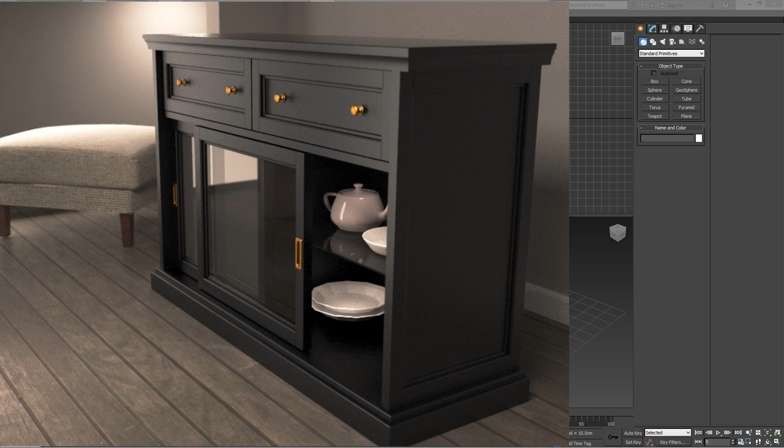Hello, in this tutorial we will be doing the Ikea sideboard. It's a nice piece of furniture. You can find it on Ikea's website, called Malsjo under sideboards and buffets.

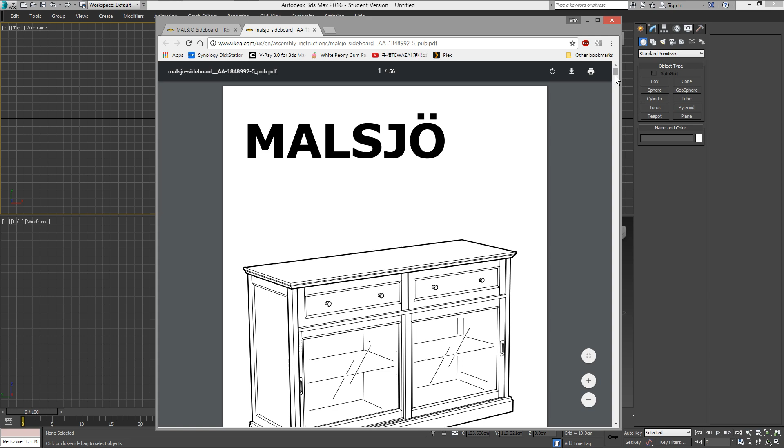If you go to product information, you can find the dimensions in inches and centimeters. Down here you'll find a PDF file with the proportions of the furniture and all the construction details. This is very useful because you don't have this information on the photographs.

So let me set up the page. Under Customize, change the unit setup to centimeters. Download the graphic with the dimensions so you can use it later.

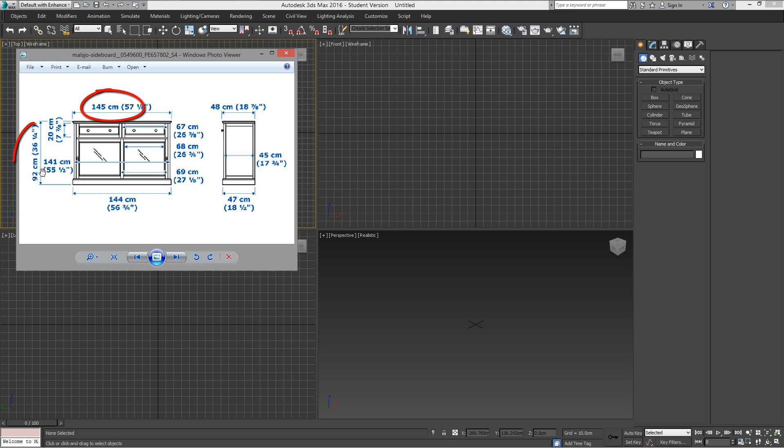We're going to start trying to get the overall dimensions of this furniture: 145 centimeters wide by 92 high and 47 or 48 deep. Right now let's just draw a box to get the height at 92 centimeters. The other dimensions are not important, only the height is useful for now.

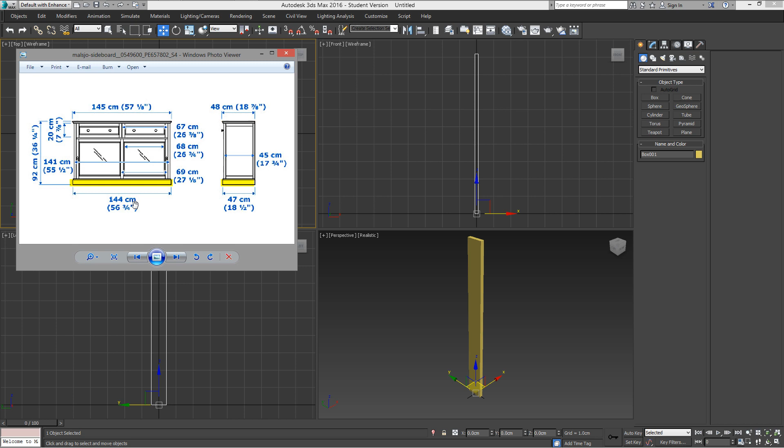Now let's start with the base. It measures 47 deep by 144 wide. The height I am going to estimate at 8.5 centimeters. So let's just draw a box, this is just a reference box. Right click here and here to center the box.

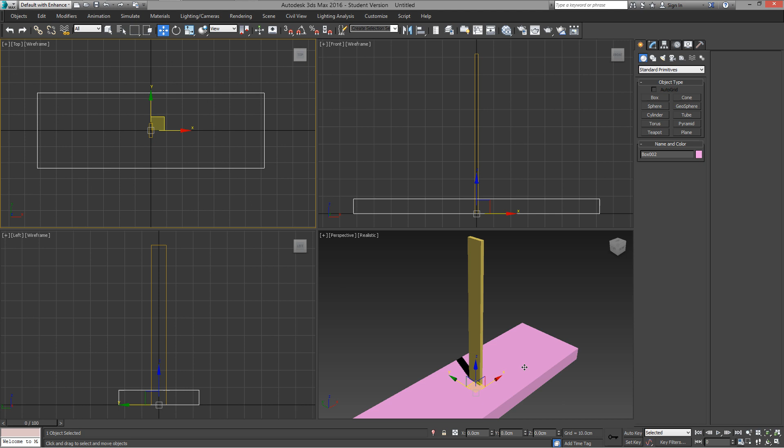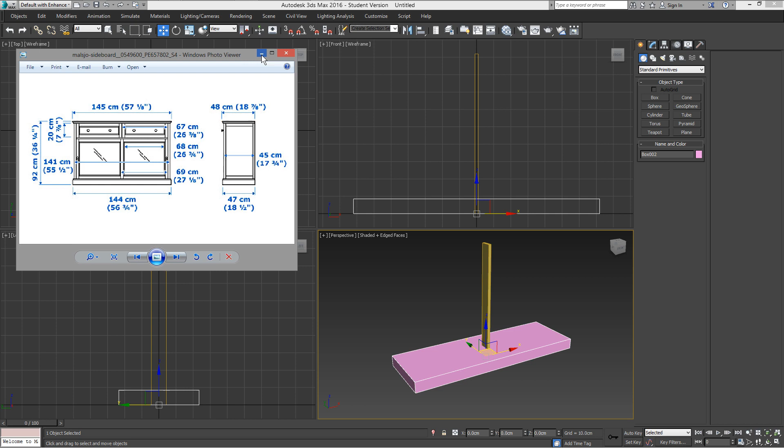Next, we need a reference box for the top, 145 by 48. I will use a slightly different size, just to make it better. I'll explain that later.

If you use 47.52 centimeters for the depth, you can leave the width at 145. The height will be 3 centimeters. Center it again and move it to the top.

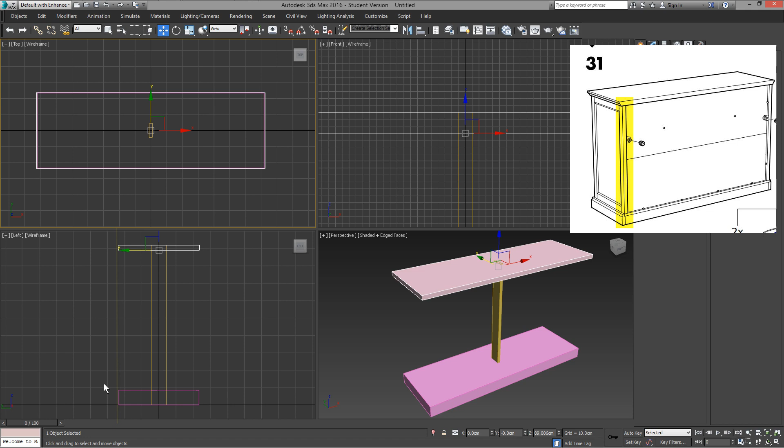We're just trying to get an idea of the overall size of the furniture. Notice the back pieces all align towards the back of the furniture, so I'm going to move the top to align with the base. This way it's centered much better, as you can see on this little square here.

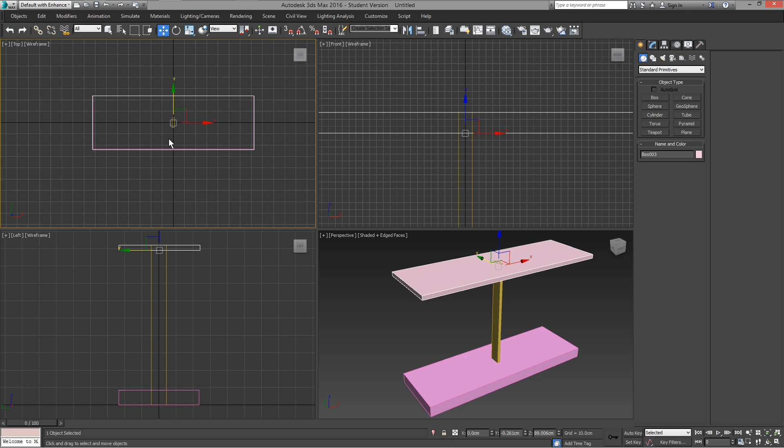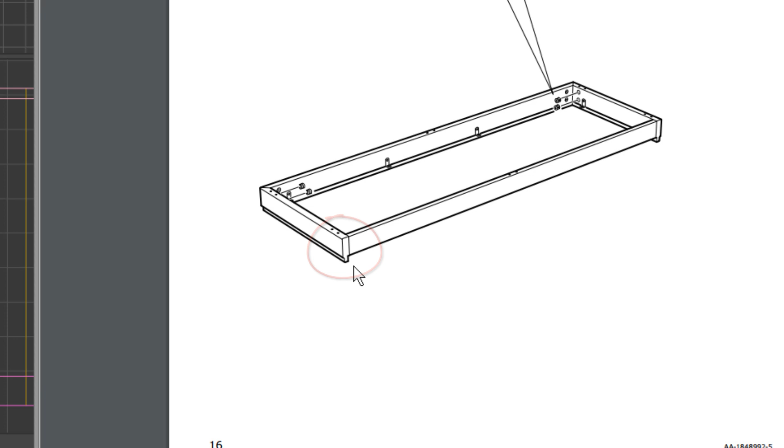Next, we need to know where to place the side frames. By looking at the photograph, I will estimate the distance from the edge. If we look at the PDF file, you can get an idea of the shape of the profile. We'll do this later, but this is just a reference to see about where the leg is going to be.

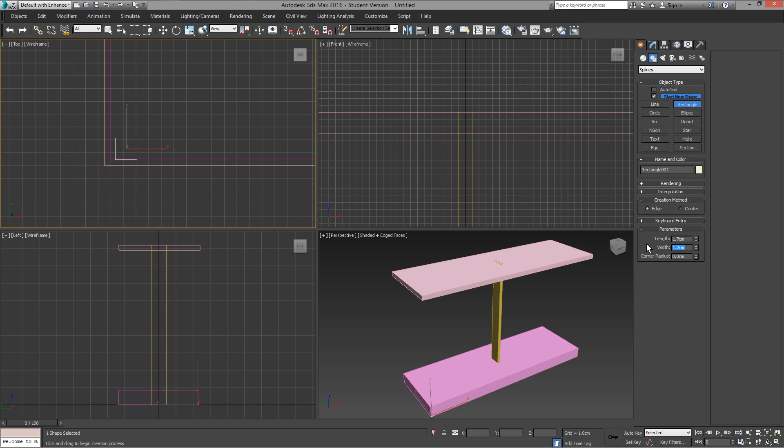On the top view, I guess the distance to the side frame is about 1.7 centimeters. So make a rectangle 1.7 by 1.7 centimeters, and then let's move this to the top of the base so we can see it.

Place it on the corner first, and then move it to the top, just a little bit above the surface. This is our reference distance.

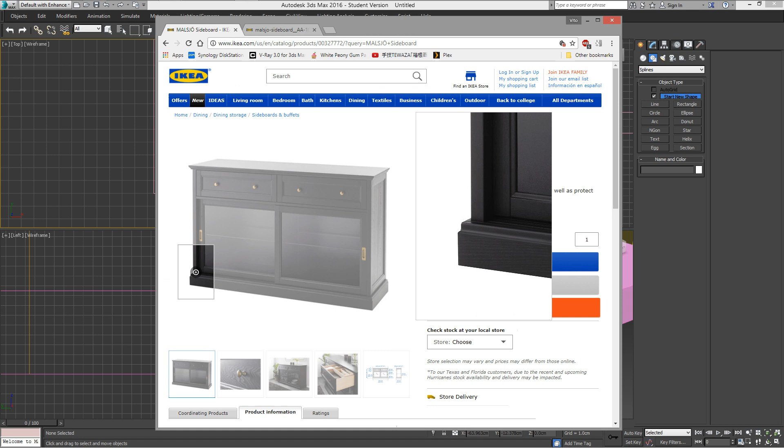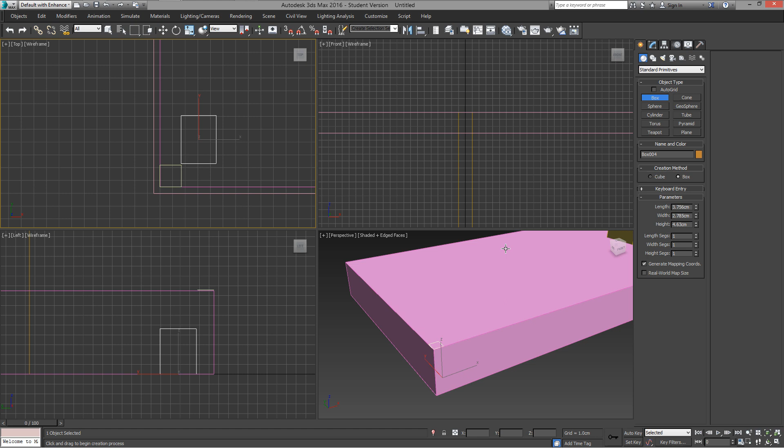Looking at the photos, I guess the size of the frame is roughly 4 by 3.3 centimeters. Let's make a reference box measuring 4 by 3.3, and you can make it 4 centimeters high as well.

We'll place this box on top, just about that corner where the reference box is. Again, this is just another helper box. Now I will make 4 copies and move them into these areas, one on the back, and then repeat this process to the top.

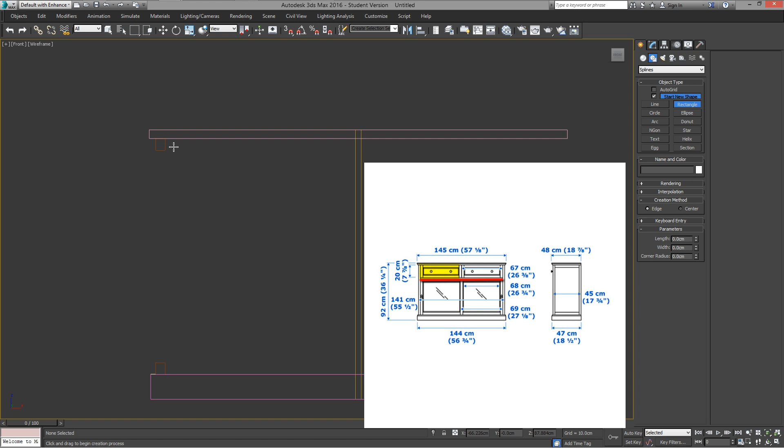Now we need a rectangle for the drawer. This will help us see where the support piece goes, the one in the red line. We know the drawer size is about 20 by 67 centimeters, so we can make a rectangle that size and move it up.

So now we know the support piece goes just below the drawer. I'll make the real support piece, estimating the depth, and place it aligned to the front of the furniture.

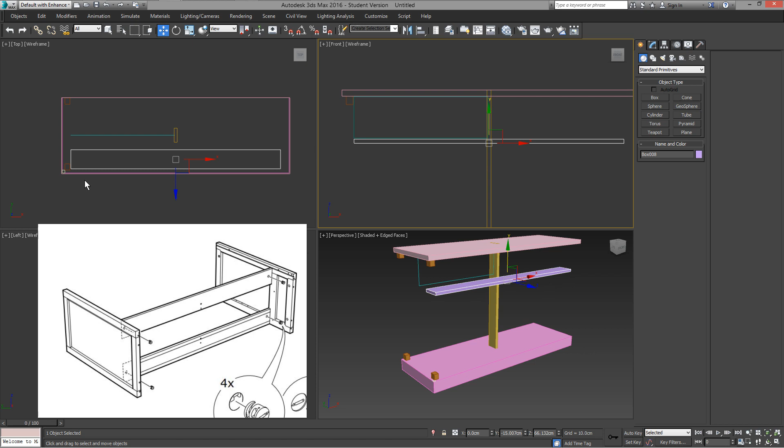The support that goes in the back is not aligned with the back of the furniture, but slightly halfway into the leg, as you can see with a red arrow. This is just leaving a little bit of space for the rear panel.

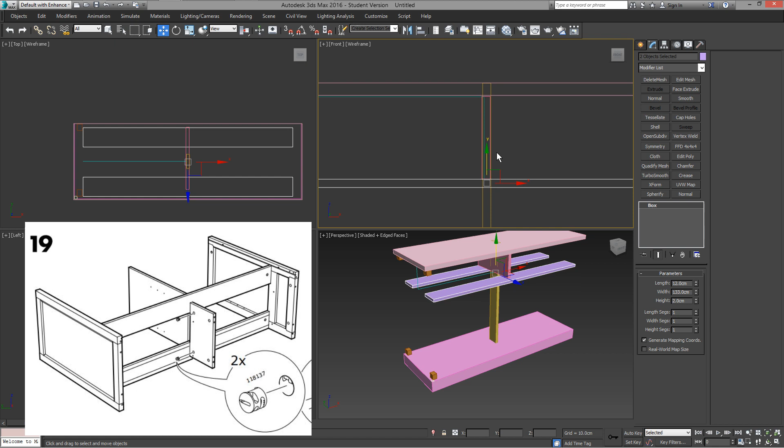Now you can draw the center supports now, or do it later, but you can make them 2 centimeters thick, and we'll adjust the actual space in the front later when we make the front drawers and the doors. This can be done later, and you can make the final corrections at the end.

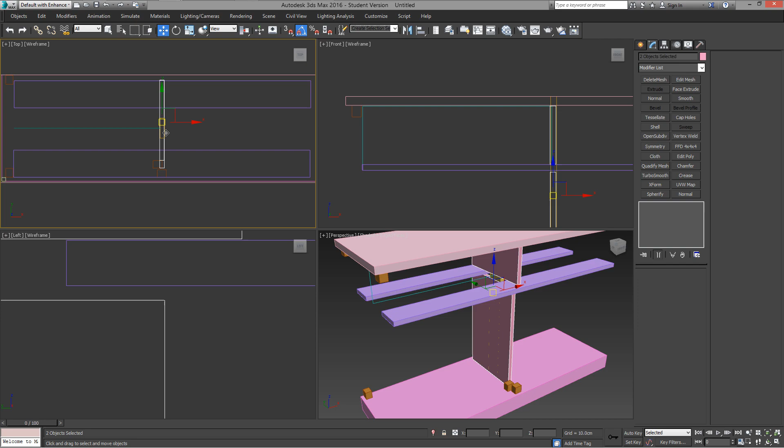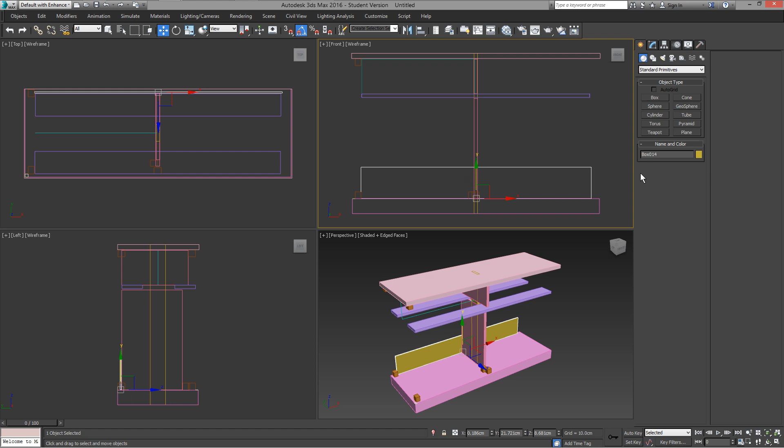Well, time to make the back panel. You can make one that fills the entire back and make it about 6 millimeters thick, 6 or 7, it doesn't really matter. It's just a thin piece of, I suppose, cardboard.

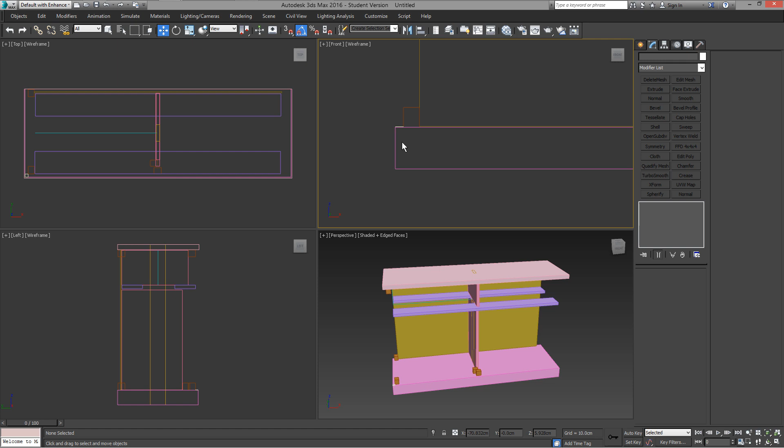Great, now we can start modeling the base. To help with the proportions, I use a small rectangle here, 1.8 by 2.3.

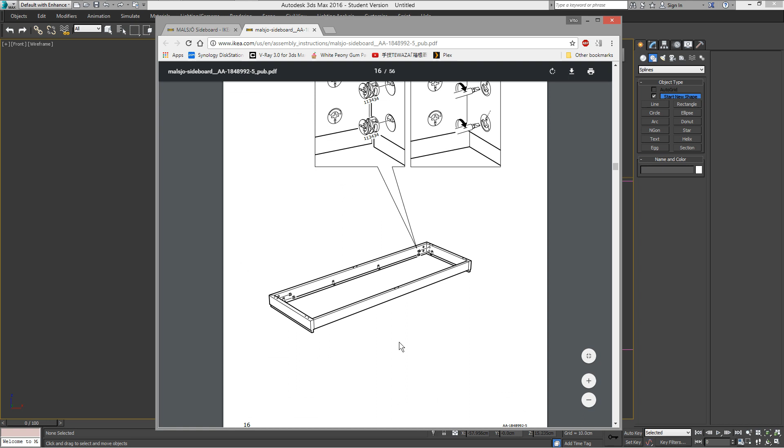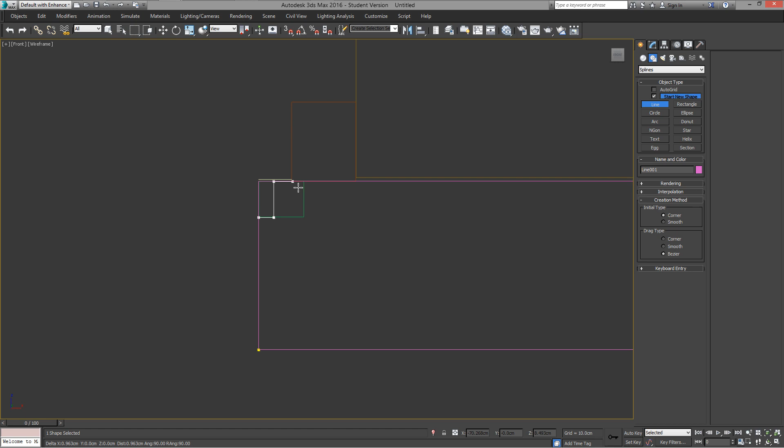The photos on the PDF file show the shape of the profile here. You can see the curve on the other side over here, so we will try to draw that. Starting with the line, press Shift as you move it to make straight lines on the front view, and draw this shape. At the back here, this step is meant for the top of the base.

We will edit the lines using the fillet. Let's move this down a little bit, and using fillet, just give it a curve. All we need to do is give curves to these two vertices. We can name this base profile.

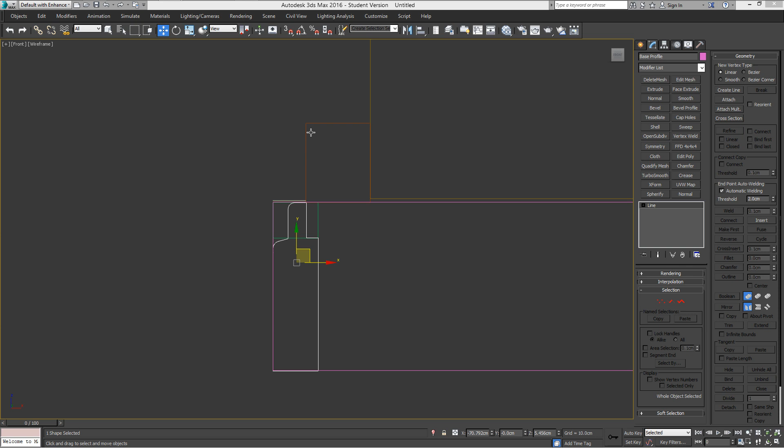Next, we can draw the frame profile. Again, I'm going to need a small helper here. This size is very important, it's 1.1 centimeter high. This shape is very similar to the one at the bottom here, just a little bit smaller.

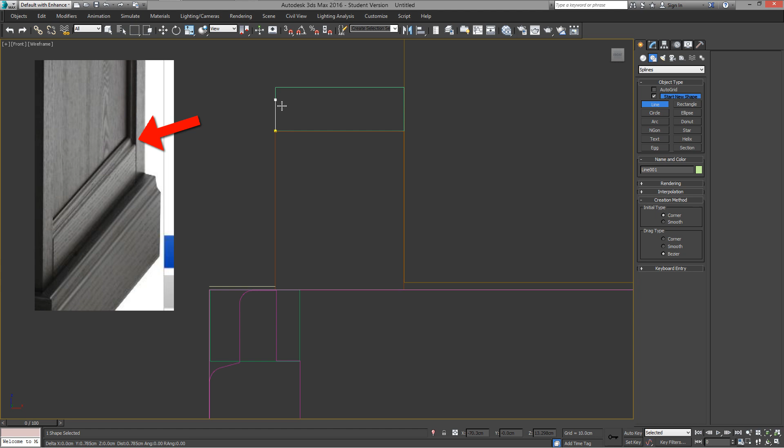But we will have a panel in the back, so we will start somewhere at the bottom here, go up a little bit, turn, and then turn right here again, it's a small piece, and then here we create a small step and close this. The step in the back is to receive the panel or the glass.

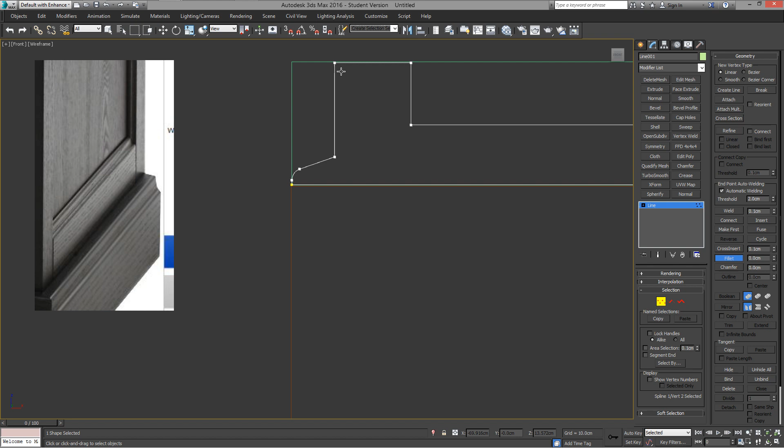So again, we will move this a little at an angle like this, and we will use fillet to make a curve here and here. You can label this as the frame profile.

Great, next we can do the profile for the top of the furniture. If you look at this drawing on page 46 of the PDF file, you can see the shape of that profile. We will just use straight lines mostly, and try to copy it. You can add a note here.

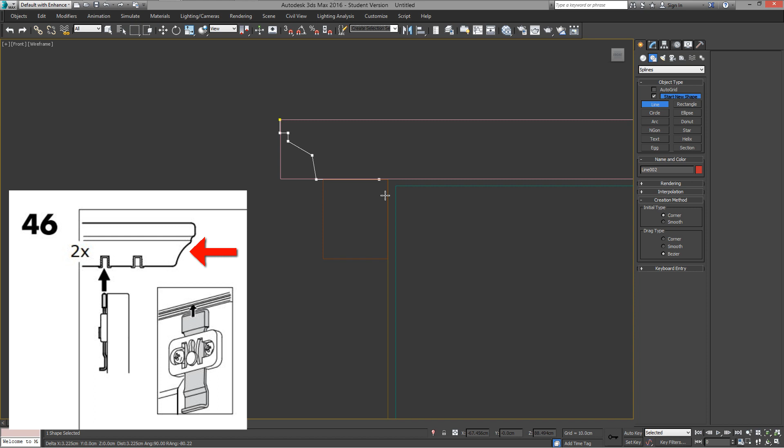And then the bottom of the furniture can go just a little bit to the right. Again, edit the vertices and turn this into a curve using fillet. You can leave that as the top profile.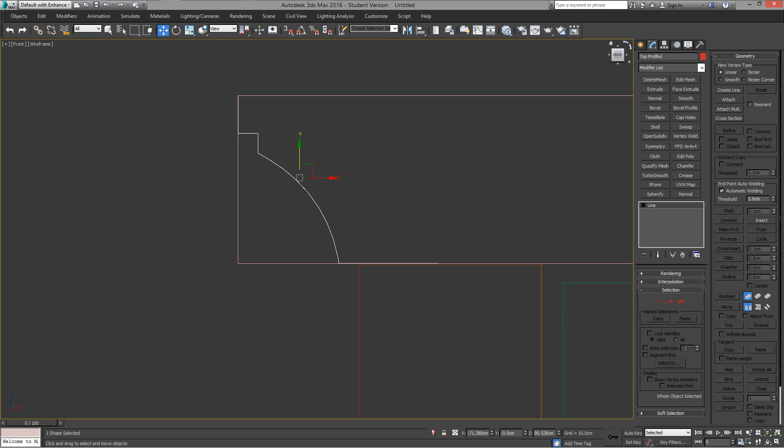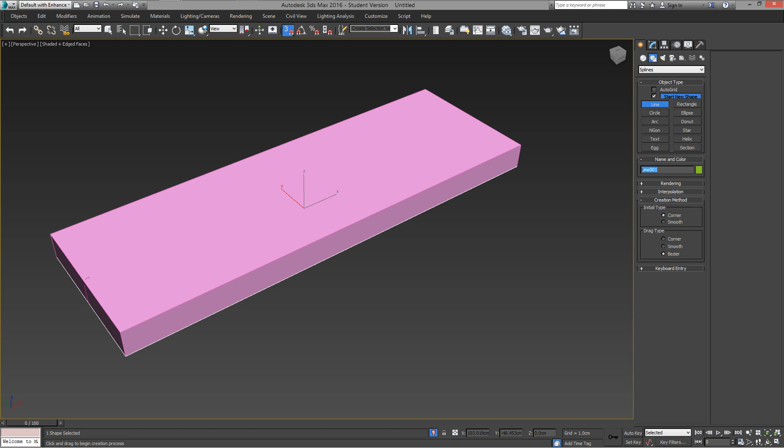All right, now select this profile at the base and the base box and isolate them. We will draw the actual base now. Draw a three-sided line, and you can use snaps to connect to these vertices. You can turn snap on and off by pressing S.

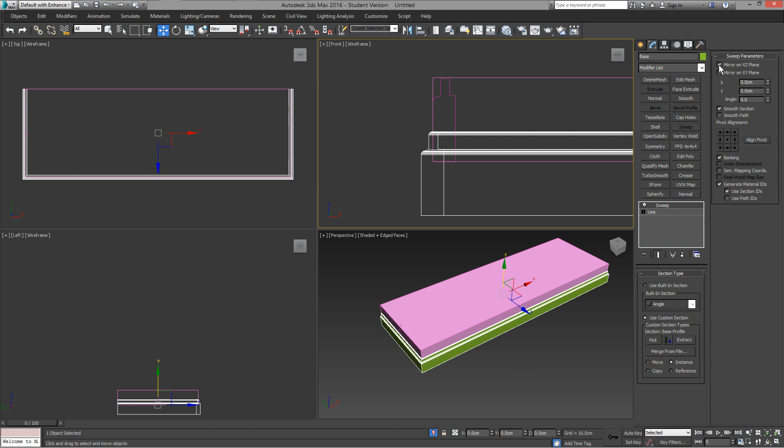Let's apply sweep to this line and change it to use custom section, and pick the profile we made. Now you have to align it. It's better to align it this way than doing it by hand.

Remove the other piece. Again, we could have done this whole thing in one piece, but I like to do it individually, just the way the furniture was built, in case I need to make some changes or add some mapping, etc.

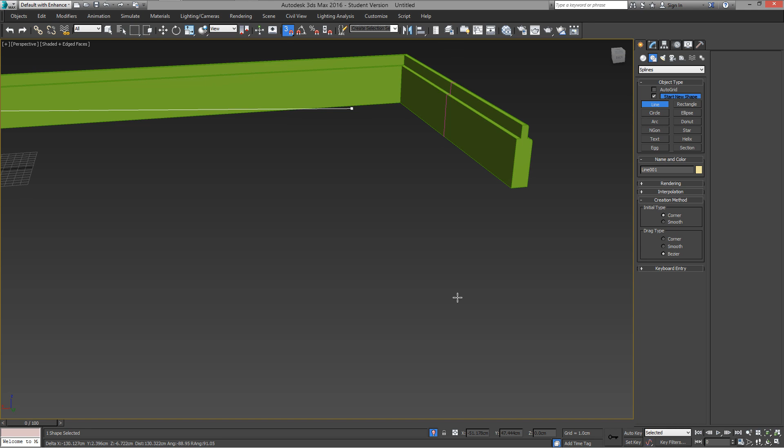So using this line in the center and tracing with snaps on, make a four-sided square, convert it to an editable mesh, and apply shell. Shell is an easy way to add thickness to the polygons.

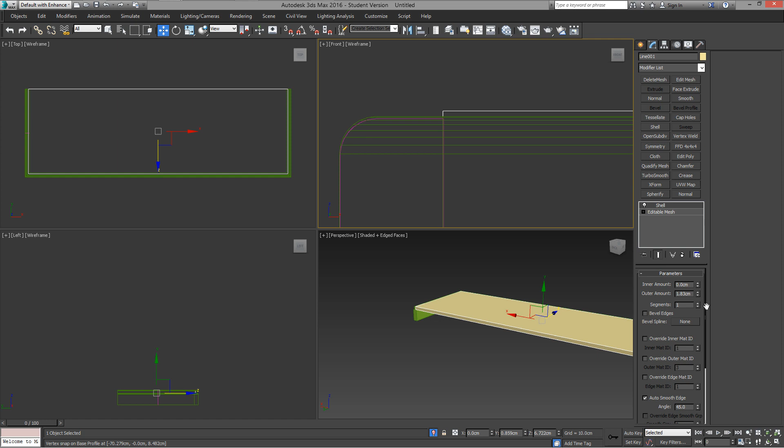Correct this so that it doesn't go much higher than the actual profile, and that will be the base. And isolate.

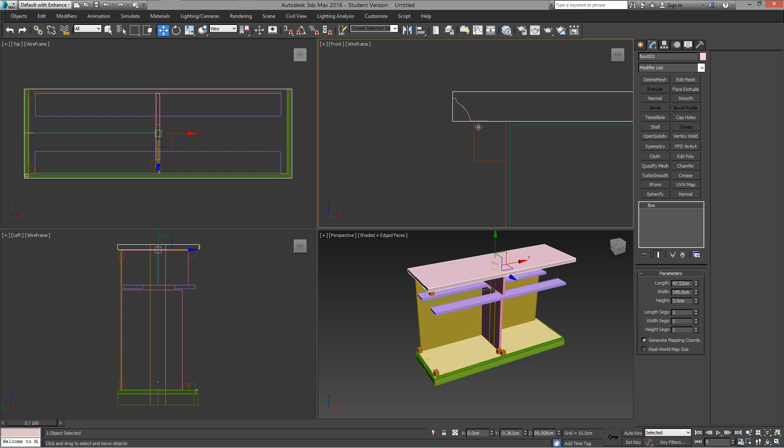Let's do the same for the top of the furniture. If you remember the steps, select the profile and the top and isolate them first. And then, I suppose we can use a line to trace a three-sided line.

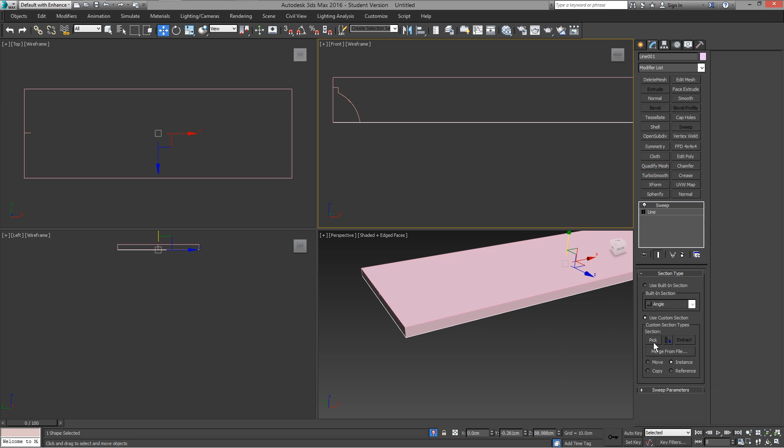Move it to the bottom here, or align it with the bottom, and use sweep the same way we did before. This one seems to be already aligned.

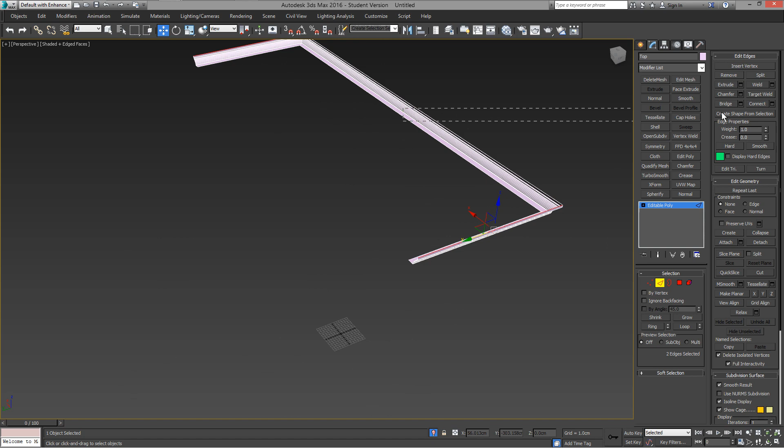Convert it to an editable poly. Select these two edges and bridge them. That will be our top for now.

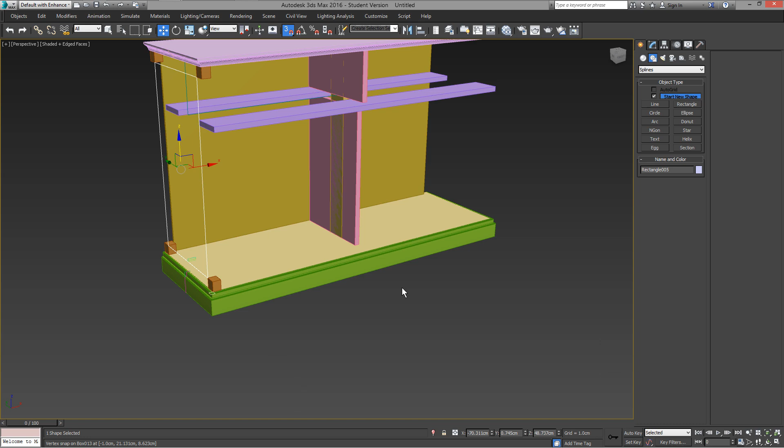Now, for the most important piece, we'll do the frame. Use the boxes for reference we made before, and make a rectangle using snaps, apply sweep, and align it.

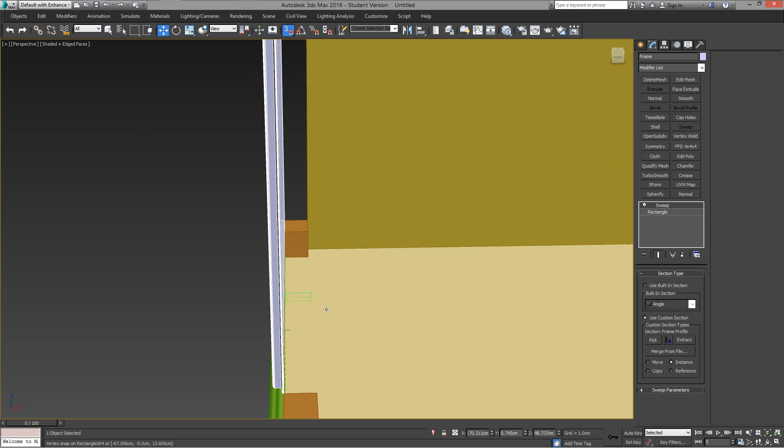Again, pick the profile we made. Here on the alignment, you may have to flip this 90 degrees to match the orientation. Make sure that smooth path is not checked.

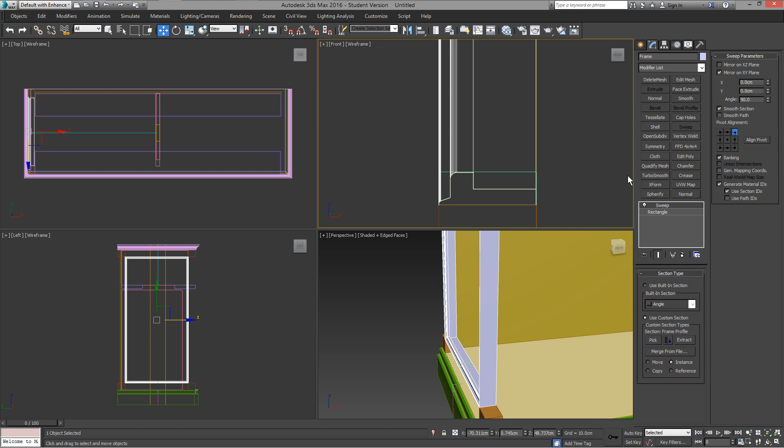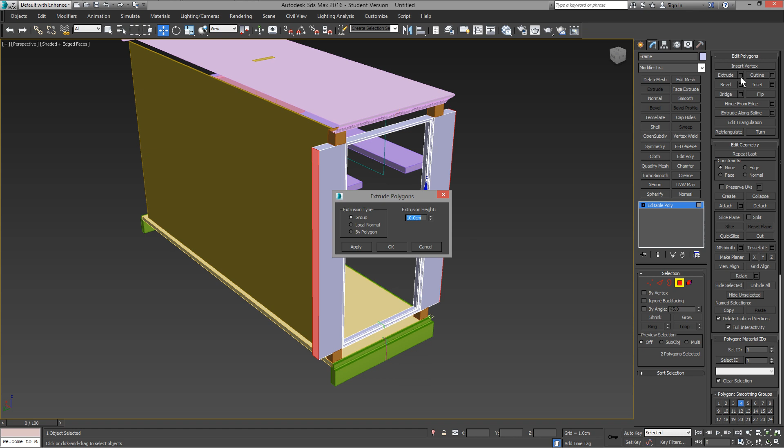All right, that looks good. Next, we can convert this to an editable poly, and we are going to create the sides at 4 centimeters. Select both left and right edges or polygons and apply extrude at 4 centimeters.

Now it's better if you isolate the item so we can work on the top and the bottom. Select the top polygons and the bottom polygons and extrude them by 4 centimeters also.

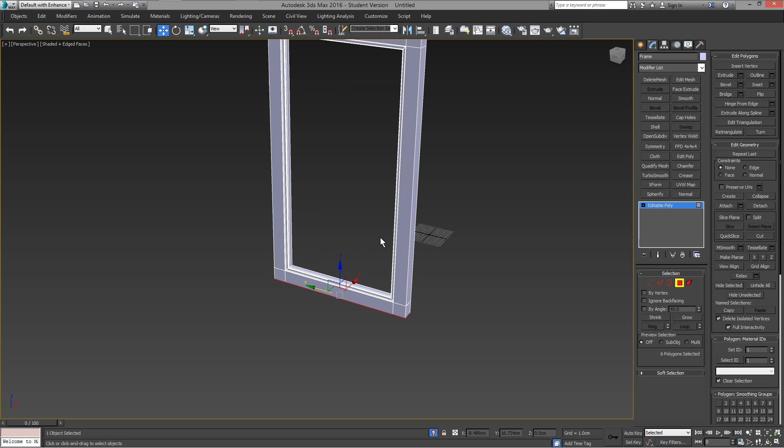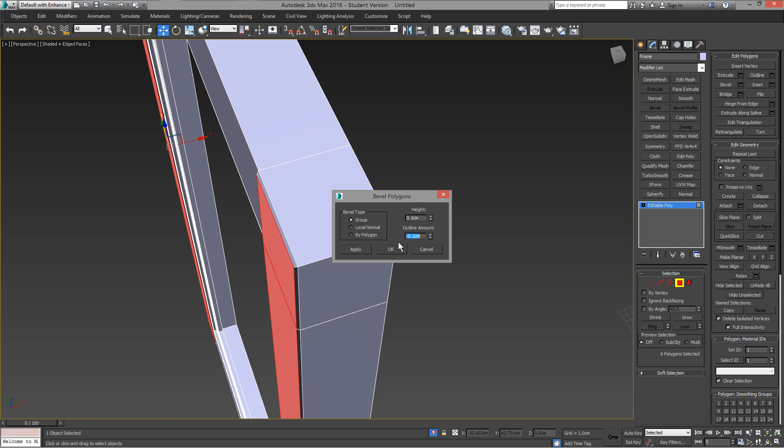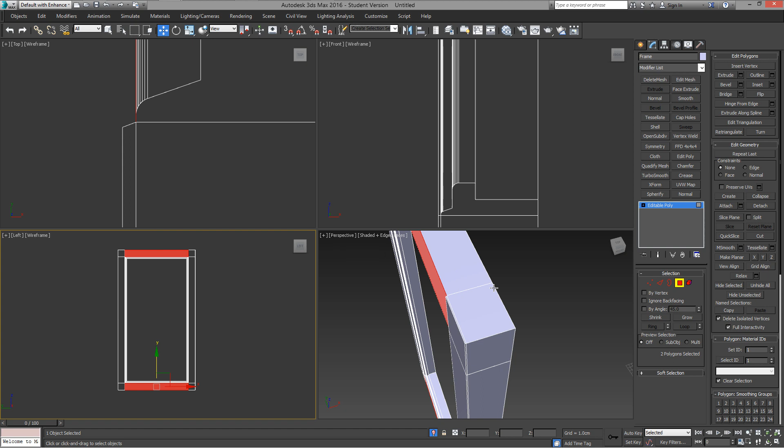Now to create these lines, you select these polygons and bevel. Use bevel, and it can be a very small amount. This is practically what this type of furniture has, maybe a laminate, and laminates are maybe a couple of millimeters thick, or a millimeter or less. Depending how much you want to see this line, you can vary and try the angle and the distance.

That will be all for this for now. Now we can add the back panel to the frame. Again, you can edit by selecting one of the lines in here. Loop. Make sure it's linear.

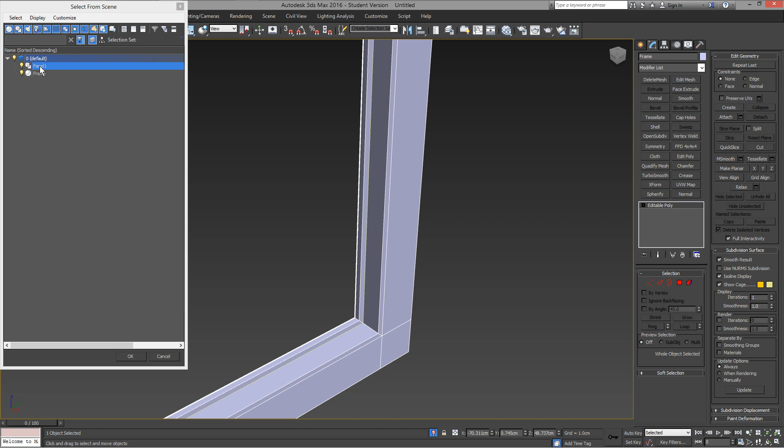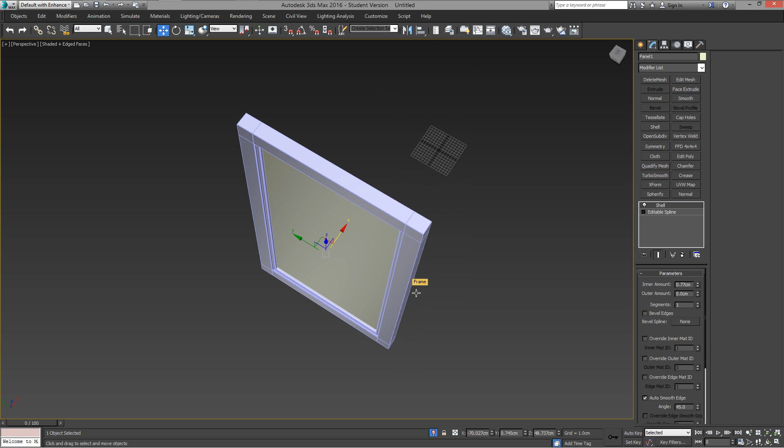Now you have to select the line you made from the list here, so make sure you don't select the furniture, the frame, rather just the line you made. Apply shell. Make sure the shell thickness is on the right side of the panel, on the correct side. And that will do for the left frame.

You can make a copy, a mirror image of this frame and place it on the other side. I will cut and continue the image in a second.

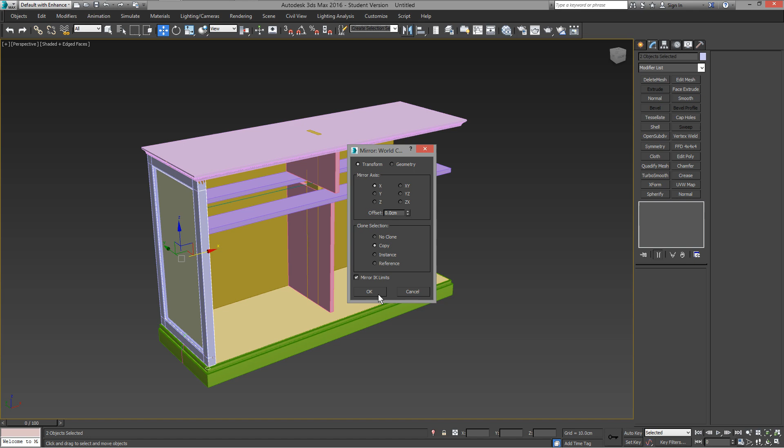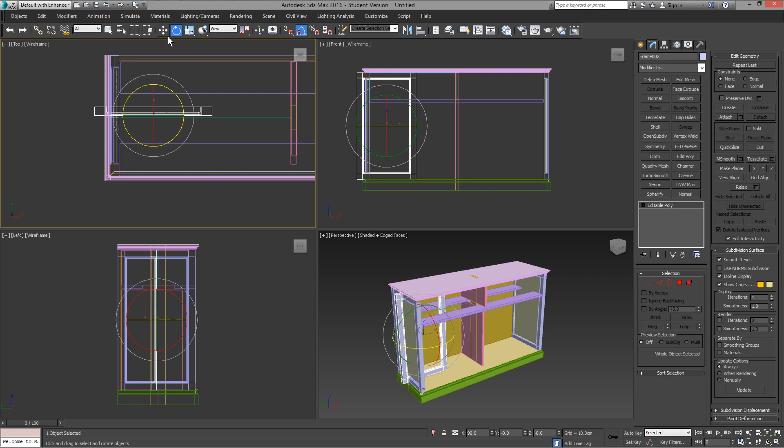From here on, the rest of the panels, the drawers and the doors, is just a matter of making a copy of the frame and changing the orientation, spinning them around 90 degrees here, and then resizing it by editing the vertices. So the drawer here has to be aligned with the front of the left frame.

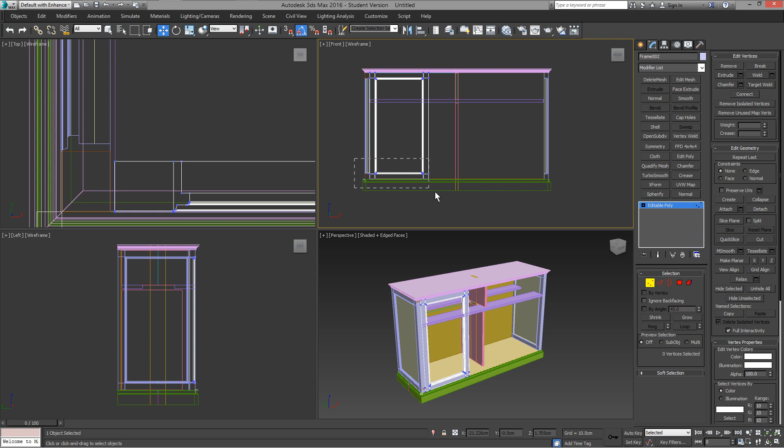Leave a little bit of space. Do not touch it because these are drawers that need a little bit of a gap there. Convert this to a poly and resize it to fit the area right inside that center, the center brace we made earlier.

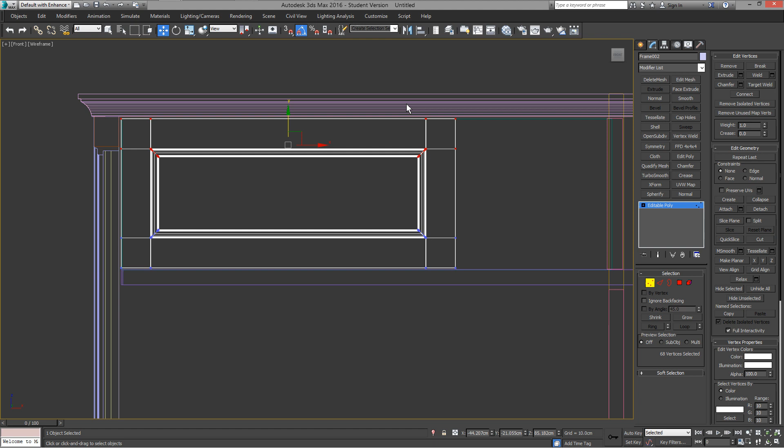So when you extend this towards the center, I looked at the images, of course, and the drawers meet at the center, but they do not overlap. They stop a little bit short.

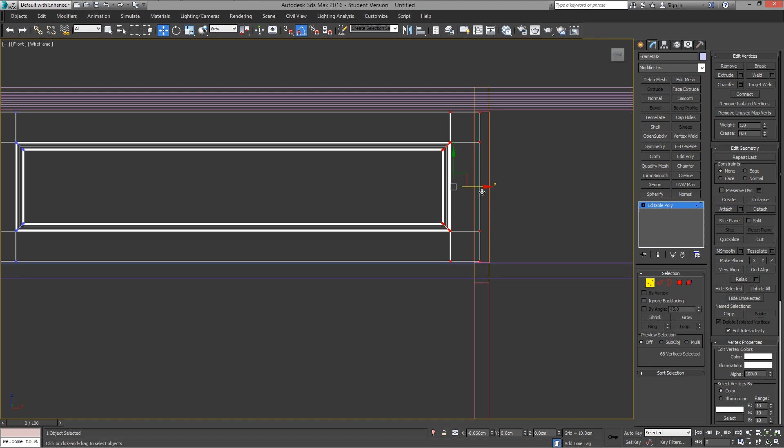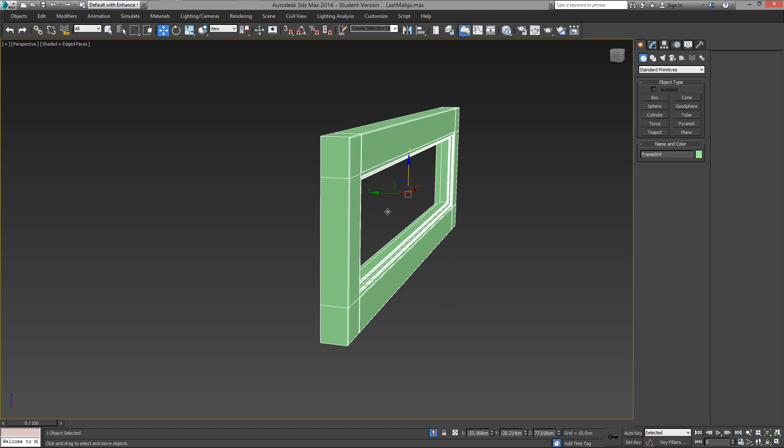So the drawers and the doors are thinner, so we're going to correct the thickness. Maybe we can go on to this view here. You can see the image showing the thickness of the door is a little bit less, maybe in the proportion of 2 to 1, about that kind of shape.

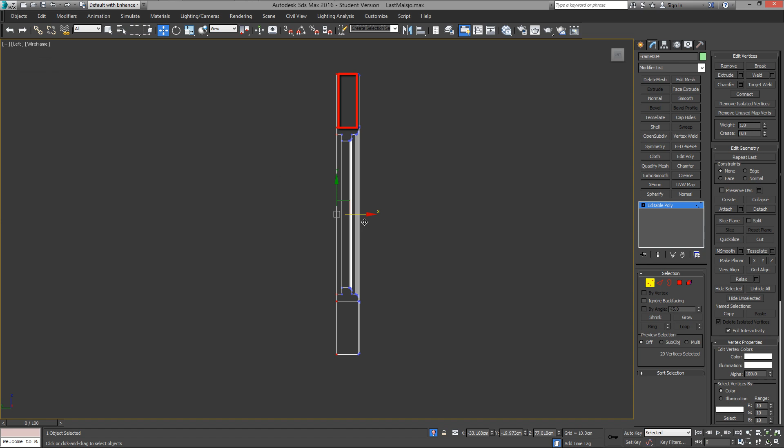Okay, so now that looks good. Let's do the same thing to add the panel on this one by selecting one of the lines and creating a shape from the selection, making sure it's a linear line as well. Select it from the list here, and then let's add shell.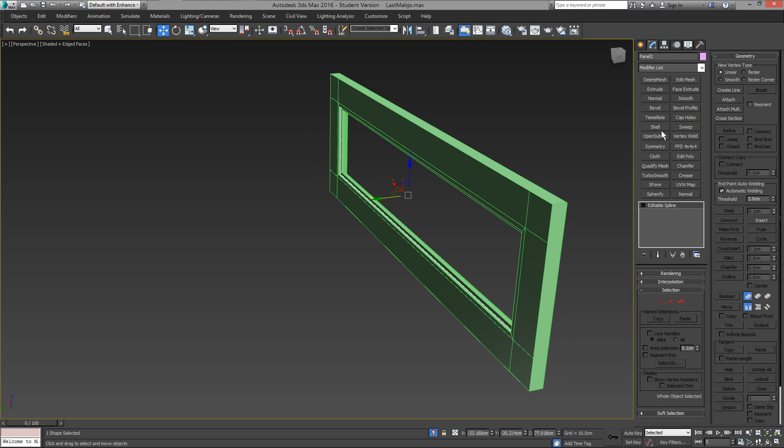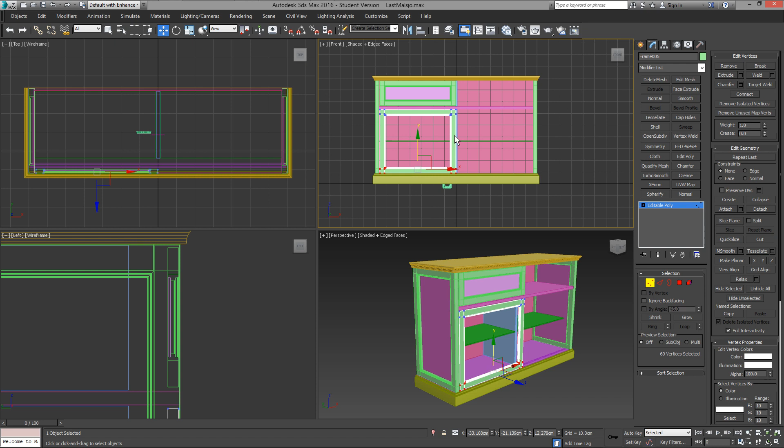Let's make a copy of this frame to make the door now. The only difference on the door is that when it comes to the center, they actually overlap because one door will go behind the other door.

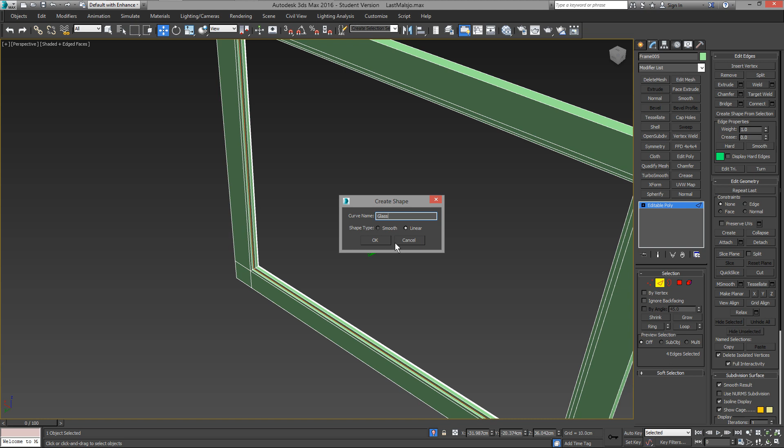Let's add a glass panel the same way. Apply shell.

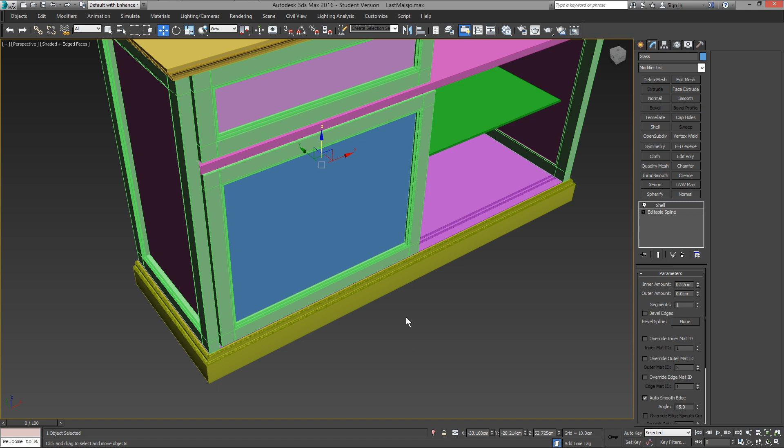After this, we can make a copy to finish the other door. So make an instanced copy and place it just behind the other door, leaving some space between them.

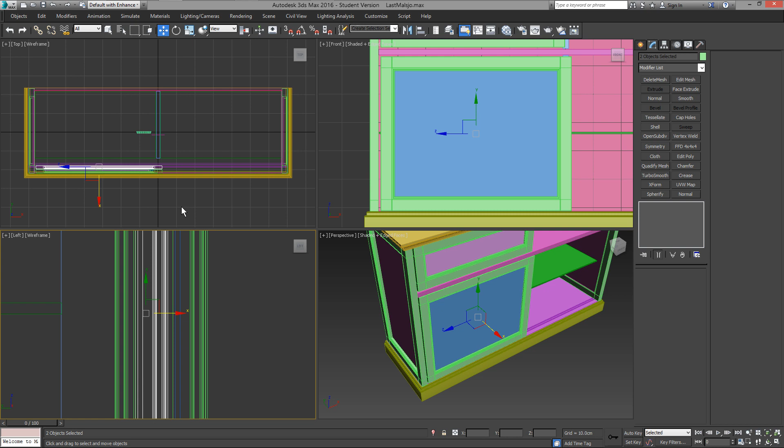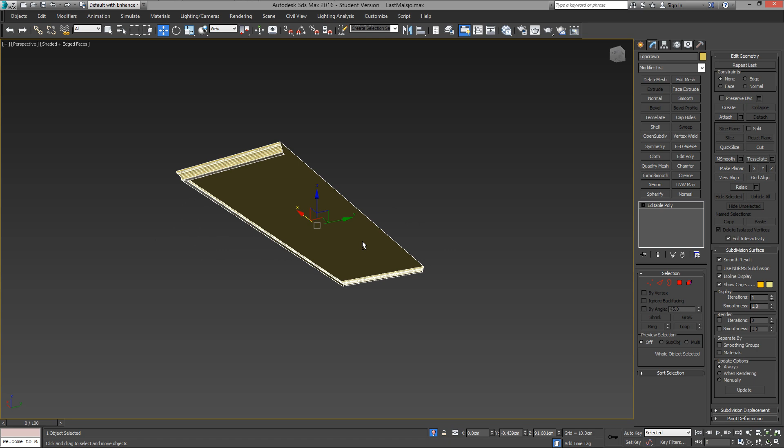Ikea shows these doors with small wheels underneath. I think that's pretty good. Oh, I noticed something, we need to finish a little bit better this.

Select these edges and we'll bridge. The back doesn't need to be closed, but that's good.

So after I organize myself and I gave some names to every piece here, I'm going to add some materials and we're going to see how good it came out in terms of the proportions. We'll compare this with the Ikea's photograph.

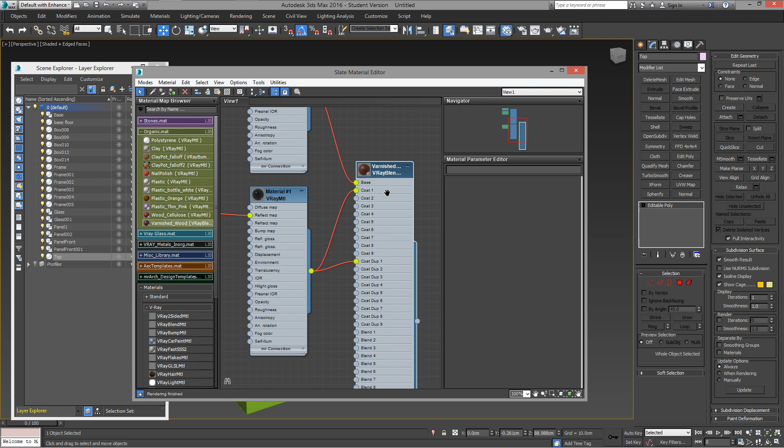Ikea says it's made of laminates and some type of glossy paint or lacquer, so making a black shiny finish.

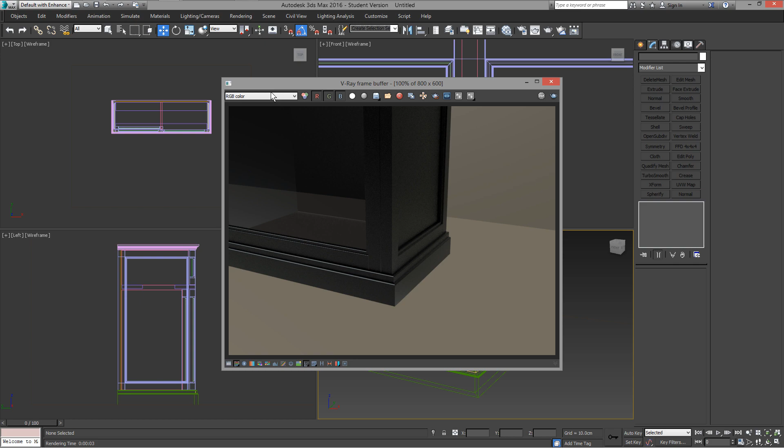Now we'll check on the proportions here, side by side with the Ikea's image, and see if they look similar. So I think that's pretty good.

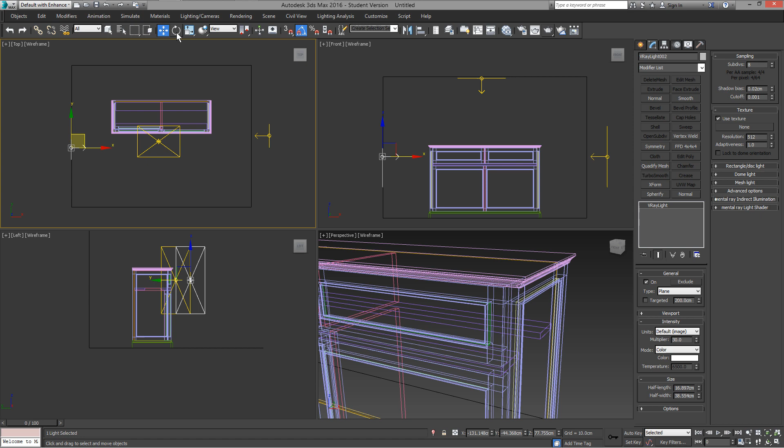I'm using V-Ray lights on a V-Ray rendering. I will come back after I finish this room a little bit and then we'll render it. I'm just making a simple setup.

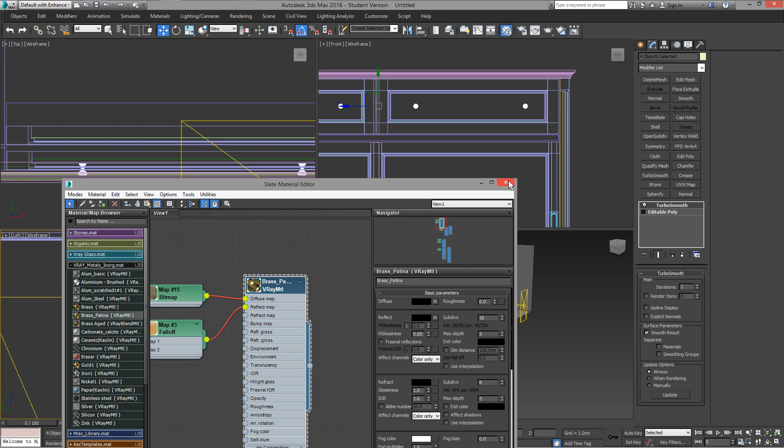You may check the other tutorials I have for the drawer knobs and for the door slider knobs. I'm using just brass for the knobs. And that's it.

Yep, that's all for the sideboard from Ikea. It's a nice piece of furniture. Using profiles and sweep is really a great and easy way to make furniture. So have fun. Thank you and goodbye.